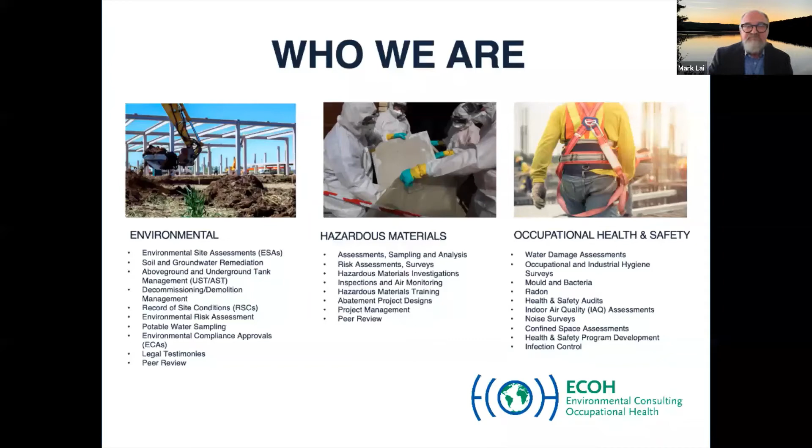What we're going to be discussing today, the topics of this webinar, will include common environmental issues encountered on construction sites, such as mold, asbestos, lead, PCBs, and we'll dive a little into abandoned chemicals and laboratory decommissioning, just to spice it up a little. Within these things too, we'll discuss the potential impacts of unaddressed environmental issues and best practices during design and construction to minimize environmental impacts.

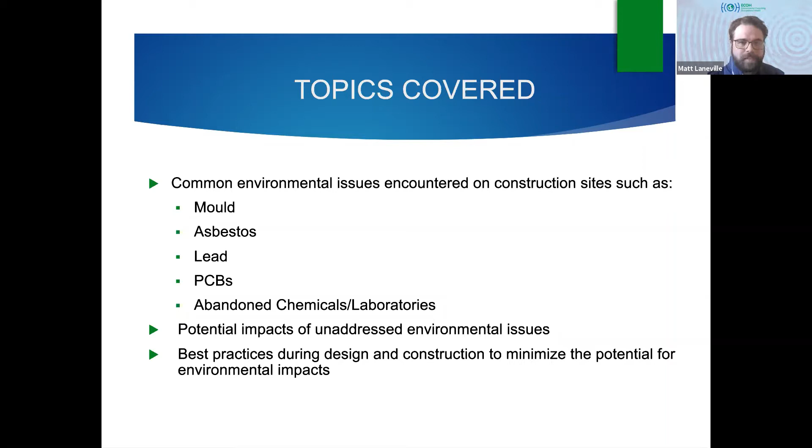So let's start by defining what an environmental setback may include. An environmental setback may be defined as a previously unknown condition, which may result in schedule delays, budget increases, health and safety issues, including stoppages of work. And for today's presentation, we'll be focusing on renovation projects rather than new builds.

The setbacks may include, but are certainly not limited to, designated substances, which we will expand on in the next slide, special handling materials, mold, chemicals, and wastewater. So an environmental setback is basically any environmental concern which was not originally identified prior to the start of work.

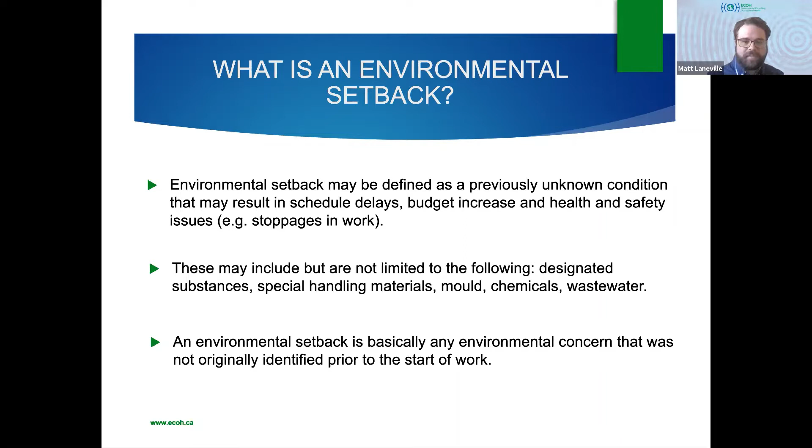Common environmental setbacks observed during construction often revolve around designated substances, as I mentioned. Throughout this presentation, we will look at the common designated substances and other environmental issues that may be present at your construction site.

So let's start off with the designated substances. We'll start off with a little bit of defining each item, and then we'll jump into some case studies that will help us illustrate how these items can be setbacks on your construction projects.

Designated substances are chemical, physical, or biological agents designated by the Ministry of Labour to be of importance in protecting the health of Ontario workers.

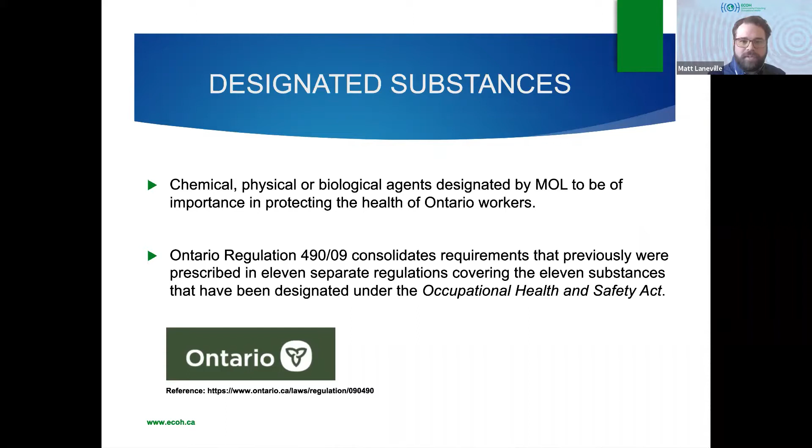These designated substances are identified within Ontario Regulation 490-09, which covers 11 designated substances. Historically, designated substances were designated due to their relatively high toxicity, or in other words, it doesn't take much of this stuff to make us sick.

As previously mentioned, there are 11 designated substances identified by the Ministry of Labour in Ontario. Today we'll be discussing the 3 most prominent designated substances with regards to potential issues with construction. These include asbestos, lead, and mercury.

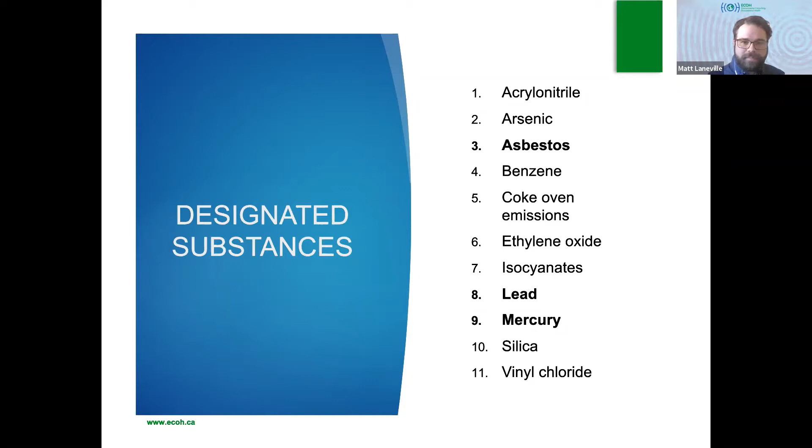This is not to say that other designated substances are not present on the site. They're just generally encountered in quantities that are of lesser concern on typical construction sites.

That being said, other materials that may be of concern that are not included within the list of designated substances are often referred to as special handling materials, and they may also be present on your construction site. Special handling materials may not be subject to specific regulations. However, the employer nonetheless must protect workers from exposure to hazardous agents, and must control airborne concentrations to be below established occupational exposure limits.

Examples of these special handling materials that may be present on your construction site include, but are certainly not limited to, PCBs, chemicals, mold, and wastewater. There are many other items that could make this list, but for the purpose of this webinar, we're limited to the above examples, which will be discussed in the upcoming case studies.

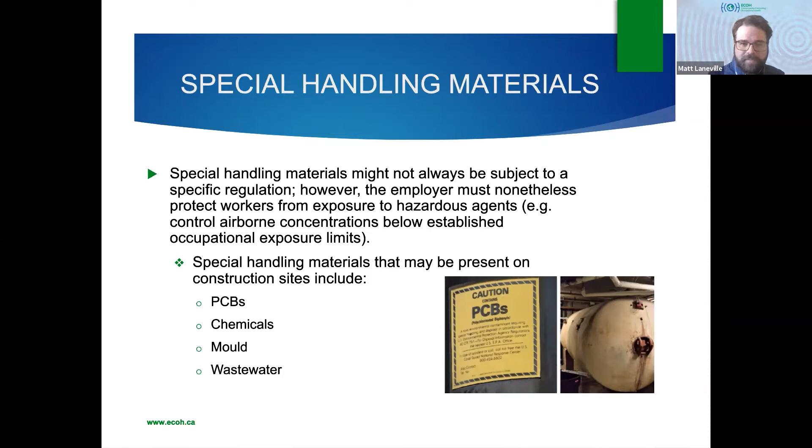Before we get into the nitty-gritty of the case studies, let's define some of these items. We'll start with asbestos, the one that almost everyone, I hope, should be familiar with at this point in time. And you might be wondering, why is this product in everything? Well, asbestos was added to products for the following reasons: its strength properties, thermal properties, corrosion resistance, chemical resistance, and because it was readily available at the time.

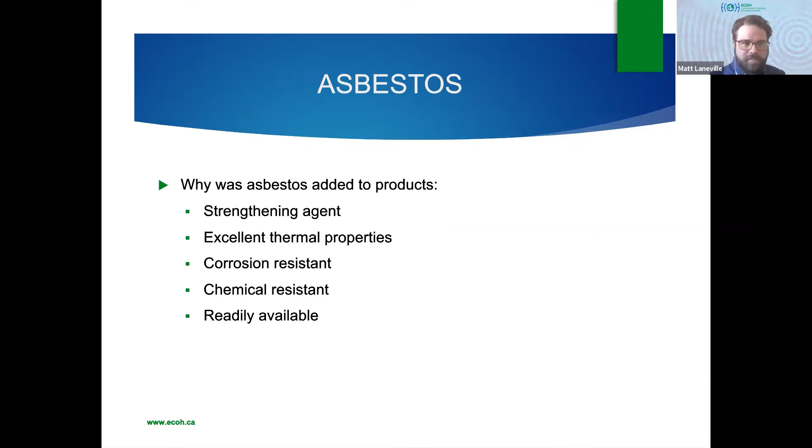Strengthening agent kind of goes without saying, it's added as a binder to strengthen materials, so you often find it in plasters and things like that. Excellent thermal properties, so without question, it's usually found in certain pipe insulations and boiler insulation materials. It's corrosion resistant, resistant to weathering and chemicals, which led it to be used widely in laboratories as well, as it wouldn't be degraded by the chemicals used in fume hoods, laboratory benches, and related HVAC systems.

We'll just get into a few examples. I'm sure a lot of people have seen these things before, but asbestos can be found in the following products that may be present on your construction site: vermiculite, whether it be loose fill vermiculite or a material called vermicrete, which is usually base coat plaster that has vermiculite added to it. It can also be found in asbestos cement pipe, pipe insulation, siding—that would be transite board. Usually siding is reserved for residential work, but sometimes transite board can also be found as backer board for electrical items, walls, and board installation.

Asbestos is also found in floor tiles, sprayed fireproofing, plaster, drywall joint compound, acoustic tiles, caulking, texture finishes, and refractory materials—materials within boilers or kilns, items that are subject to high heat regularly. The list can go on, and unfortunately I don't believe we have enough time to continue defining where asbestos can be, but I think the image is clear that it's in the majority of materials that may be present on construction sites.

Unidentified asbestos can cause numerous issues on a construction site, including health and safety issues if a material is unknowingly disturbed, as well as schedule and budget creep, increasing cost, labor, and disposal when these materials are identified.

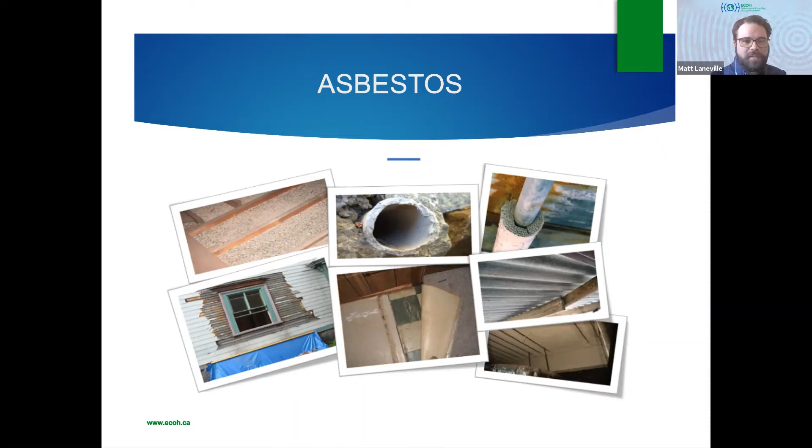That's a good practice to take, as oftentimes as buildings age, they go through renovation. There are many cases where asbestos containing materials may not be visible to the naked eye, and may be covered with newer materials, such as plaster covered by new drywall which is non-asbestos containing, or previously insulated pipes with asbestos wrapped again with fiberglass insulation. Things like that are often present on sites, and it's something most people on site will not want to encounter. So it's best to try to identify these materials as early as possible, so we can include this in the design and construction phase, and safe handling and removal can be worked into the budget and schedule.

You might think the newer building you're working in is asbestos free, but you may want to think again. Asbestos products may still be used in construction when there's not a suitable replacement. As I mentioned previously with laboratory fume hoods, benches, and HVAC components, up until recently, transite cement pipe was often used for these materials given its resistance to chemicals. Regardless of it being banned early on, it was still quite widely available and used.

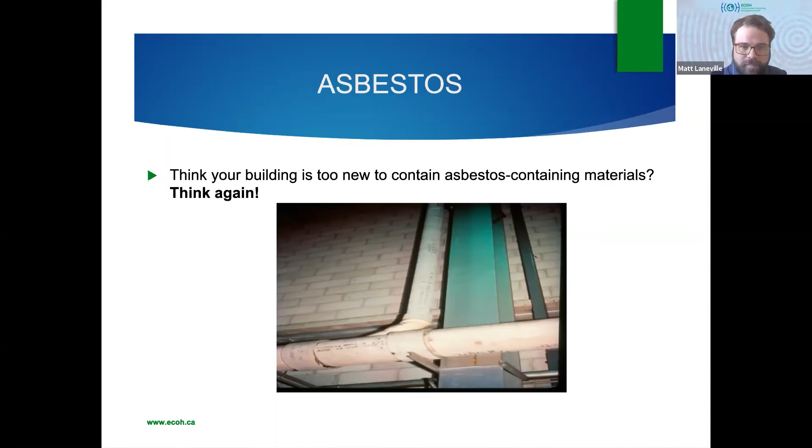Now that we've had a bit of a refresher on asbestos, this leads us into another environmental issue that may be present on the site, which is lead. Again, with asbestos, you might be wondering why lead is in everything. Well, here's some reasons: it was widely available at the time.

It has a low melting point, which made it easy to work with when forming. High density, it's also capable of blocking sound, durable, and prevents corrosion. It was added to paints to brighten colors, so reds and yellows and things like that would stand out more. It's very abundant, easy to extract, easy to shape, a malleable material. It blocks radiation, great for that depending on if you have radiation present on site, or even NORM risks, which is naturally occurring radioactive material. It's also been known to kill mold and mildew, and it helps paint dry faster.

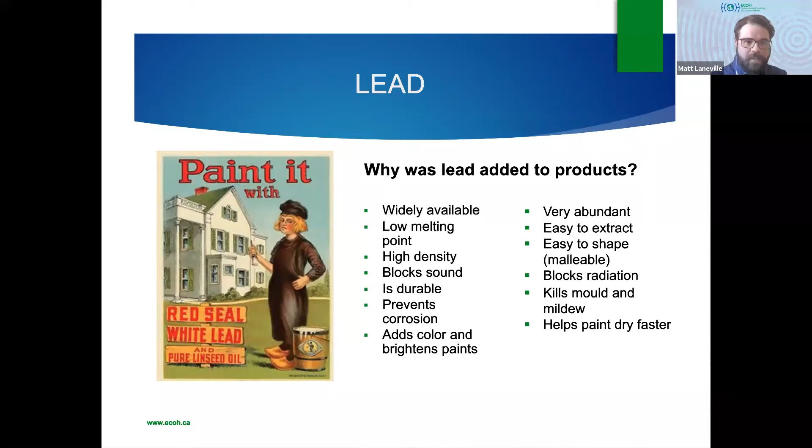As with asbestos, we'll go through a few items where lead may be found, and this includes gaskets. The automotive world definitely used quite a few lead gaskets, counterweights within windows or doors, batteries, pipe packing, where bell joints are often packed with malleable lead, and acoustic baffles, again due to the sound deadening properties of lead.

Common environmental setbacks that may be encountered around lead or other heavy metals include discovery of lead-containing materials during construction. We may identify lead paint as the project is ongoing, and this may require a swing in work practices and potential disposal implications, causing delays for follow-up trades due to additional work procedures. So if you're identifying an item that needs demolition that's covered in lead paint, this may impact your schedule because proper procedures will be required to remove this material prior to follow-up work.

Additionally, unknown hot removal of lead-based paint, whether that be torching, grinding, or heat removal, may potentially contaminate the work area. Unknowingly disturbing these lead-containing paints through these methods may result in your work area being contaminated, which ultimately may require cleaning and decontamination to move forward.

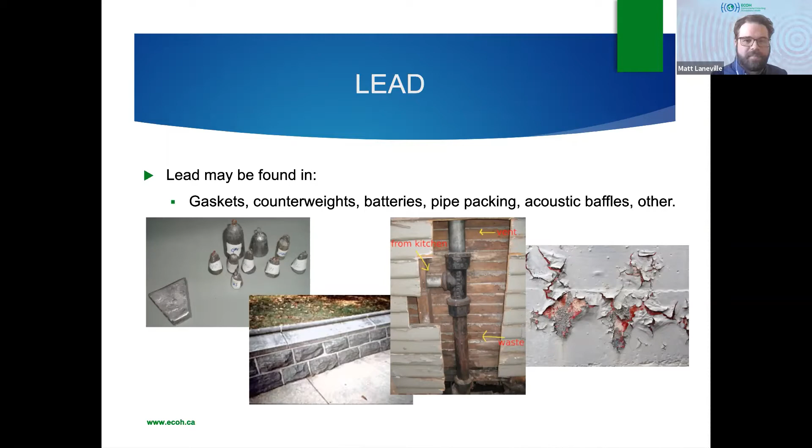This brings us to abandoned chemicals and laboratories. We'll do a quick definition of what some of these items might be. The historic use of the building is key in identifying potential environmental health and safety issues. So if you're working in something like a laboratory or where chemicals were present, it's very important to understand why they're there, what they were there for, what their uses were, and who was using them.

Abandoned chemicals may be present on your site, or residuals from these chemicals. For example, a chemical that will certainly cause issues during renovation is the presence of perchlorate crystals. This is crystallized material that results from the use of perchloric acid, and these crystals are considered shock sensitive. So bumping or hitting them will cause an explosion, which of course no one wants on their site due to the numerous issues that will follow this incident.

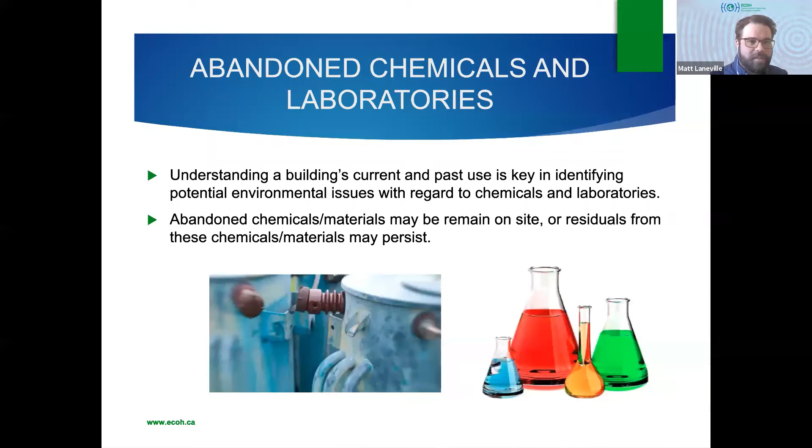So for instance, if your project requires the decommissioning of laboratory equipment, it's imperative to attempt to obtain this information. And if you can't obtain this information, it's always best to err on the side of caution, as delays may be encountered if these items are identified either during construction, or unfortunately, if somebody accidentally bumps them and has an incident causing health and safety problems.

Another item I'd like to touch on, which is common sometimes on construction sites, especially larger sites, is wastewater. Wastewater can be defined as any liquid present on site requiring removal or disposal to access work items. A good example would be a chiller system or HVAC components that generally have water through them, typically with some sort of corrosion resistant additive, that makes it not just plain water anymore - it's becoming a wastewater concern.

For the purpose of this webinar, we'll be discussing wastewater with regards to chiller and mechanical systems. Stay tuned for further webinars with regards to groundwater and dewatering processes, as that is kind of a separate topic with regards to more new construction and environmental subsurface work.

Wastewater is often assessed at the time of disposal. However, thought should be given at the planning stages, as options for disposal are present and they may alter budget depending on applicable waste streams. For instance, Ottawa has a sewer use bylaw, which exists not just in Ottawa but in many cities. As a result, we can sample the wastewater and apply it to these regulations to determine what waste stream is required.

Depending on what additives are in your wastewater, you can even get approval from the city to dispose of this material through the sanitary or storm sewer. Storm sewer can be as simple as spreading the material on the ground, depending on the contaminants present.

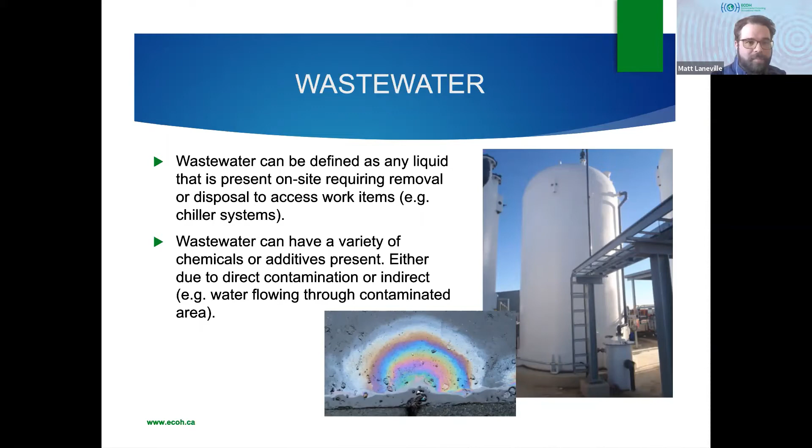Another topic, which again has been encountered on many construction projects I've been a part of, is mold. I'm sure nobody's new to this item - it's been around for a long time and makes the news quite regularly. This is often an item that lurks in the shadows. We often think we understand what mold is, and with any luck, you attended our previous webinar put on by Rob Fernandez last month, which will give you a great understanding of mold.

It's also available on the website if you want to return to view that presentation. So a brief overview of mold: fungi is a single-celled organism that absorbs nutrients from their environment. They're simple microscopic organisms, found in every ecological niche - indoors, outdoors - necessary for recycling of organic materials, and they need external food sources. So things like paper backing on drywall, paper wrap on pipe insulation - things like that are all very good sources for mold growth.

Given that mold is not always obvious, it may be included as part of a pre-renovation or demolition designated substance survey, which ECOH generally includes as part of their survey. This allows for proper planning and implementation of programs prior to construction. A trained inspector will not only look for mold, but other signs of water damage which may give indications that mold is present - bubbling paint, signs of high humidity, for instance condensation on windows, and things like that are what to look out for as signs of potential mold growth.

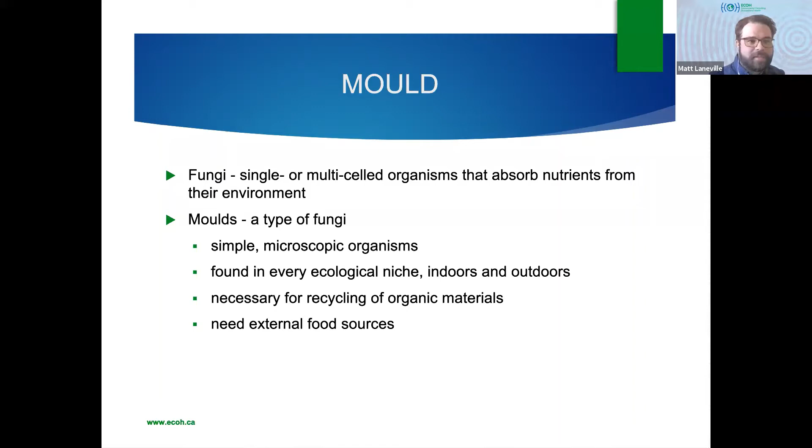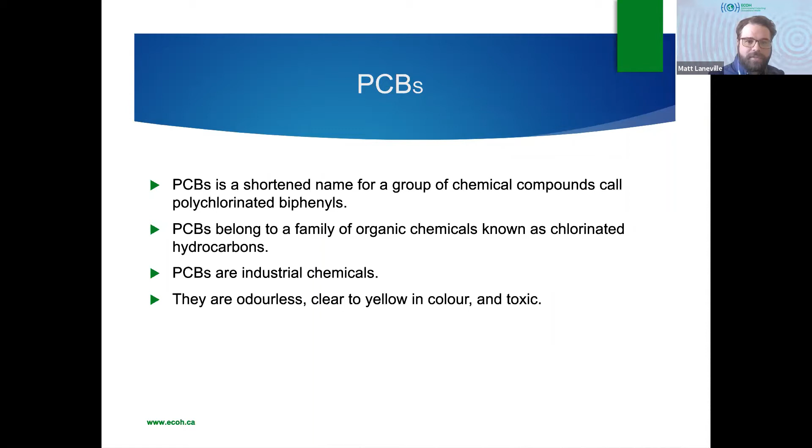Our last item of concern, which is more of a special handling item, is PCBs, or polychlorinated biphenyls. Most people know them as PCBs. They belong to a family of organic chemicals known as chlorinated hydrocarbons. They're typically industrial chemicals, and they are odorless, clear to yellow in color, and are highly toxic to organisms.

Here's a few examples of where PCBs can be found. PCBs may be present in equipment left on site, for instance transformers, fluorescent light ballasts, and high voltage wiring. There's a PCB impregnated coating typically found in some high voltage wiring, and also in caulking and industrial paints. PCBs were added to caulking and industrial paints for elasticity purposes, however this was prior to our knowledge of how detrimental PCBs were on the environment.

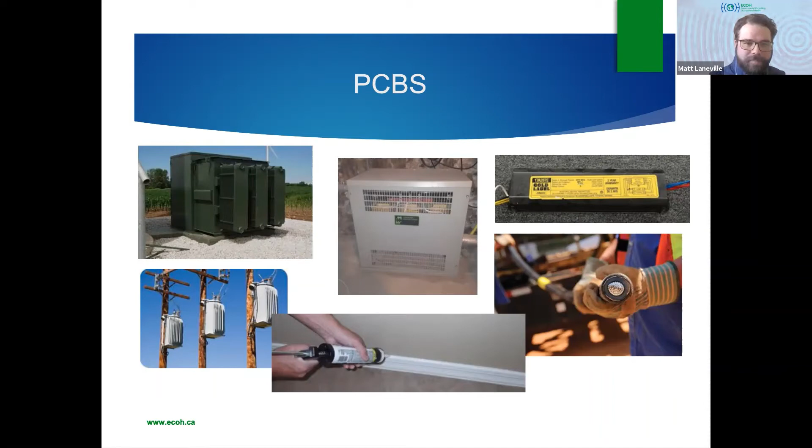Now that we have a little bit of base knowledge on some of the more environmental concerns, we might be asking, what does this mean for us? Let's examine what unidentified items may cause for your site through the following case studies. We will examine some of the encountered environmental issues and their effects, which may include worker health and safety, refusal to work, stop work orders, fines, project delays, and budget overruns. Not to mention, any of these items may result in negative impacts to reputation and may garner unwanted media attention.

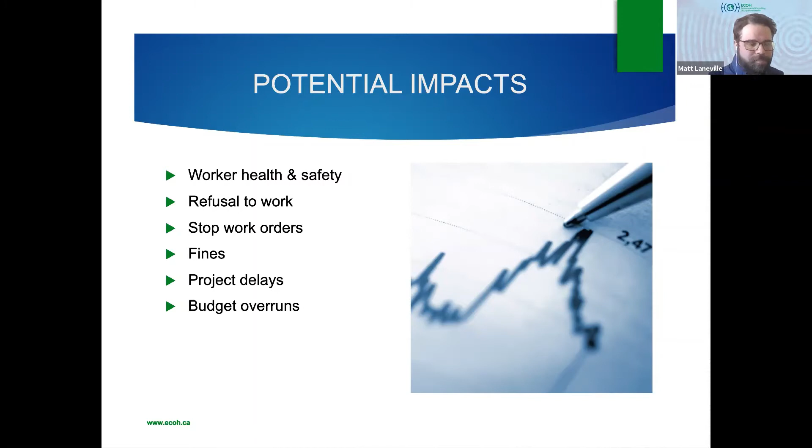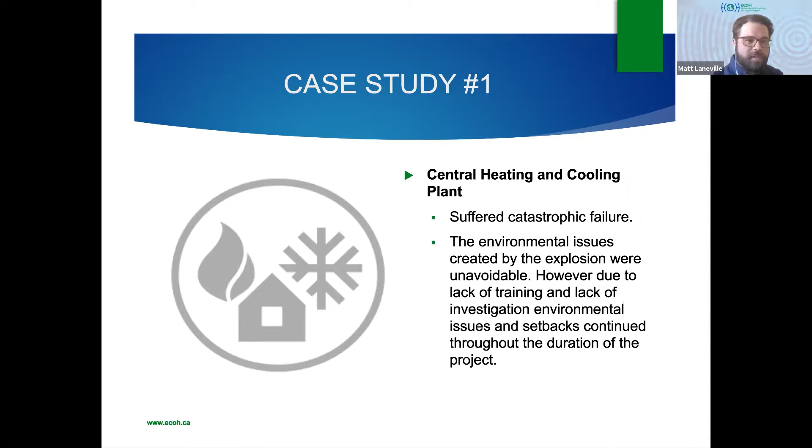This brings us to our first case study. This revolves around a central heating and cooling plant which suffered a catastrophic failure of a boiler, resulting in an explosion and spreading asbestos-containing materials across the entire facility. Obviously, the environmental issues created by the explosion were unavoidable. However, due to lack of thorough investigation and training, environmental issues and setbacks continued throughout the duration of the project, which included budget creep and schedule delays to address these issues.

We'll be talking about a few different environmental issues with regards to this project, starting first with asbestos. As a result of asbestos-containing materials being strewn across the facility, the entire facility was subject to a cleaning program to facilitate safe entry and to isolate the boiler side, which was the side of the building that suffered the catastrophic failure, from the chiller side of the building, which was still in an operational state.

Following this cleanup, the boiler side of the facility was placed under a type 3 asbestos abatement containment: shower in, shower out, negative pressure, with continual air monitoring required outside the containment to ensure people without asbestos safety precautions were not being harmed.

This was done to clean the facility and also to demolish the damaged boiler under safe precautions, as it was unknown if internal materials of the boiler were asbestos containing at that time. During this time, it was requested that additional investigations be performed on the remaining boilers to identify any potential asbestos containing materials that may be contained within the wall cavities and ceiling cavities.

As these boilers were also scheduled for demolition, it was best to try to identify these materials before exiting the existing type 3 containment. That way they could be dealt with within the same containment and not have to return to the site under type 3 precautions.

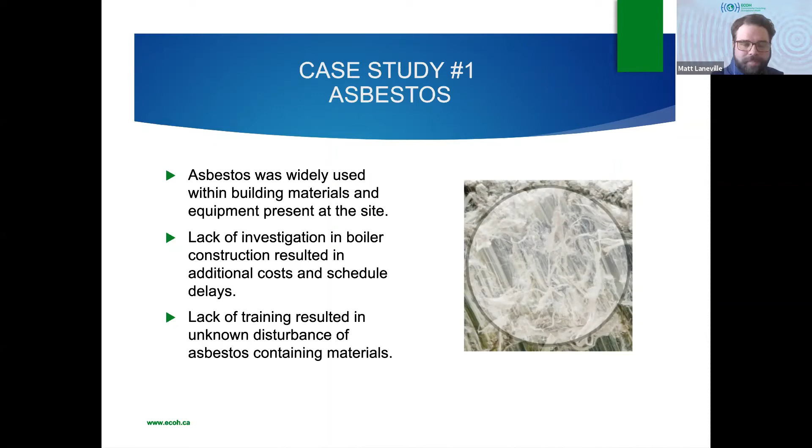So not only was asbestos an issue with regards to case study 1 in the heating plant, but lead was also a major issue as we proceeded with demolition. So lead-based paints were widely present at the site given its age. It was considered to be the oldest operational boiler plant in Canada at the time.

The discovery of lead paints resulted in the development and implementation of lead abatement procedures, which delayed demolition, as now all the boilers were required to be demolished by hand. This required high temperature cutting and appropriate PPE and engineering controls with regards to lead abatement.

So it doesn't sound like the end of the world, does it? We're already under type 3 asbestos conditions, so adding a little bit of lead precautions in there isn't the end of the world.

But what was not anticipated was the amount of high temperature cutting that would be required, as the initial plan was to demolish the boilers using machinery rather than hand demolition. Removing it by machinery would have allowed for less lead risk and would have been completed in a more timely manner. An excavator with a grapple or a snipper would be much faster than 3 or 4 individuals with torches.

Keeping distance and maintaining safety at all times slowed the project down quite a bit.

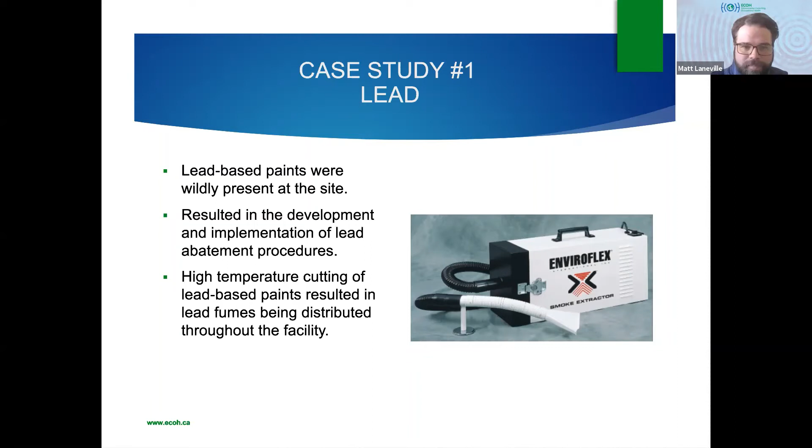This brings us to case study 2, which is an example of what I like to call doing it right. This case study involves a government building previously used for metallurgy research. The plan was to use this building as swing space, office space for public servants while another space was being prepared. This facility contained a working foundry for metallurgy research.

Prior to its shift in use, it was recommended that a thorough investigation be performed regarding potential environmental and health and safety hazards. This investigation included chemical sampling, but also sampling for heavy metals associated with the historic foundry use. That includes wipe sampling for lead and other metals, and sampling for mercury, which often gets trapped within plumbing systems, since it's very dense and stays within the P-trap system. So we did a very thorough investigation of all drains, sinks, and floors within the facility to determine if any residual mercury was present.

Also, if you recall, I mentioned perchlorate crystals earlier. In this case, it was undetermined if perchloric acid was used in the facility, so that was added to the risk assessment given the unknown.

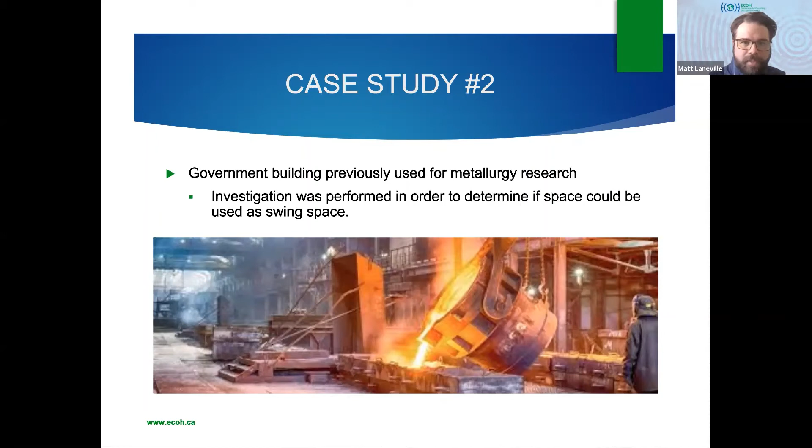So that brings us to case study 3, which consisted of a large multi-building complex undergoing major renovation across multiple buildings. This included a complete gutting and rebuild of the majority of buildings and the demolition of some buildings in their entirety. This site encountered a variety of environmental issues, which were initially reacted to as they occurred as the project progressed. After a few months of progressing this way, it was determined that a proactive approach would be better to reduce schedule and budget creep, and remaining buildings were investigated prior to trades entering to perform the work.

The initial designated substance reports that were provided were considered superficial in nature, as they were performed when the buildings were occupied and did not encompass the entire scope of the renovation project, as it was not determined at the time of the initial survey. So the surveys were performed without knowing entirely what the scope would be.

In addition to this, the previous surveys were superficial, which means non-intrusive. An intrusive investigation would be opening up walls and ceiling cavities in order to identify building materials that may be present. As I mentioned earlier, with asbestos, sometimes it gets covered up. Pipe insulation gets rewrapped with fiberglass. This initial intrusive investigation would allow us to attempt to identify all these materials by creating openings into the wall and ceiling cavities, removing pipe insulation to ensure that fiberglass is the only insulation present.

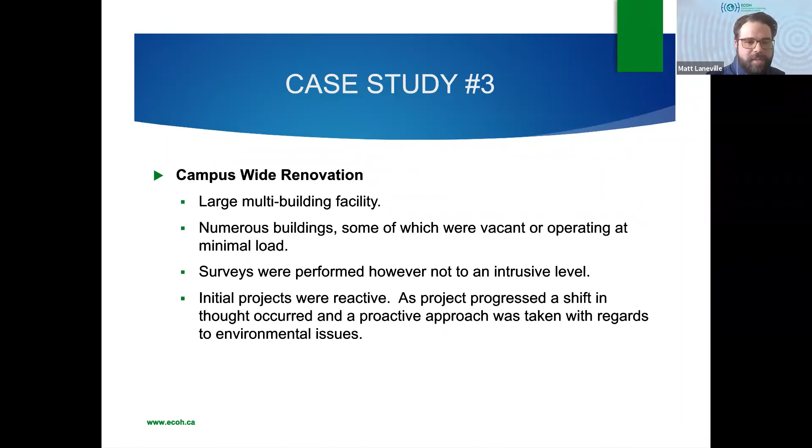This brings us to case study 4, which again is a nice example of doing things right. It is regarding laboratory decommissioning. This research laboratory was used for various research and manufacturing purposes with regards to satellite communication, and it was scheduled for decommissioning so the space could be turned into a fitness center.

A consultant was called in at the design phase and was given access to facility records, and was able to interview staff. Current and retired staff were interviewed to determine what chemicals would have been used on site.

This was all done prior to arriving on site for the investigation, as a gap analysis. But once it was determined which chemicals were used in the space, a sampling strategy was developed with an industrial hygienist, which set the framework for the assessment.

The assessment for these materials included the removal of a raised floor within the laboratory where the semiconductors were manufactured. The initial review indicated that heavy metal contamination was present in the form of lead, mercury, and arsenic. Lead and arsenic were due to the historic production of semiconductors.

Semiconductors are basically a combination of gallium and arsenic, also known as gallium arsenide, which is generally considered to be a carcinogen since gallium arsenide can dissociate into gallium and arsenic, which is a designated substance.

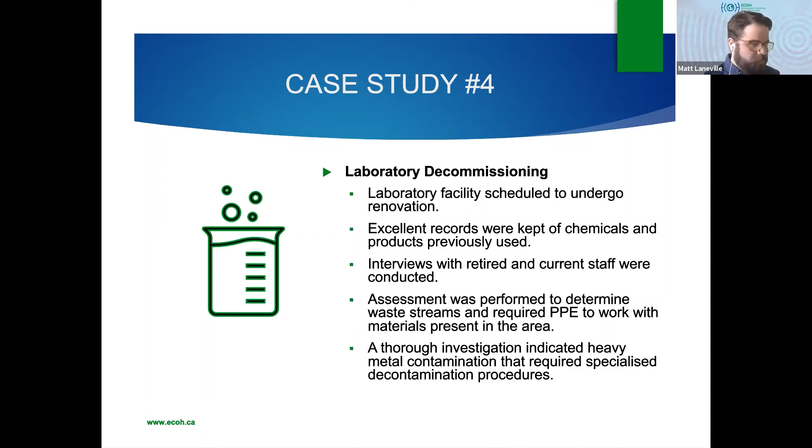So ways to avoid setbacks, and what have we learned? Well, based on going through some of those case studies, we have learned that training is very important. This is extremely important with regards to allowing individuals on site to identify any potential hazards or issues prior to them becoming setbacks.

For instance, if a worker had been trained in asbestos awareness or designated substance awareness, they would have the knowledge to be able to stop and reevaluate a situation where suspect asbestos or hazardous materials are present. This would be prior to the creation of a health and safety or environmental issue, prior to the disturbance of the material, which, as mentioned, occurred in case study 1 on a few occasions, but with the gasket removal being the example we utilized.

Also, a thorough investigation of building use will allow anticipation of environmental issues, and with any luck will allow for correct handling of potential environmental issues to prevent unknowing scheduling and budget concerns. In other words, it may help us anticipate and react to environmental issues before they become setbacks.

So as I mentioned with the case study, the government complex, we managed to get in there before other trades to remove the hazard, which allowed them to complete their work in a timely manner without any sort of delays.